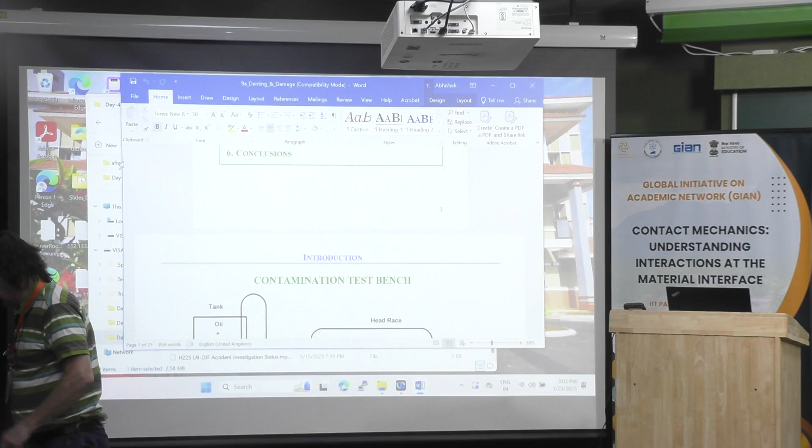That's okay. Is everybody here? Maybe not, we have to wait a little more. No, I need to download a video which is on my computer and not on this one.

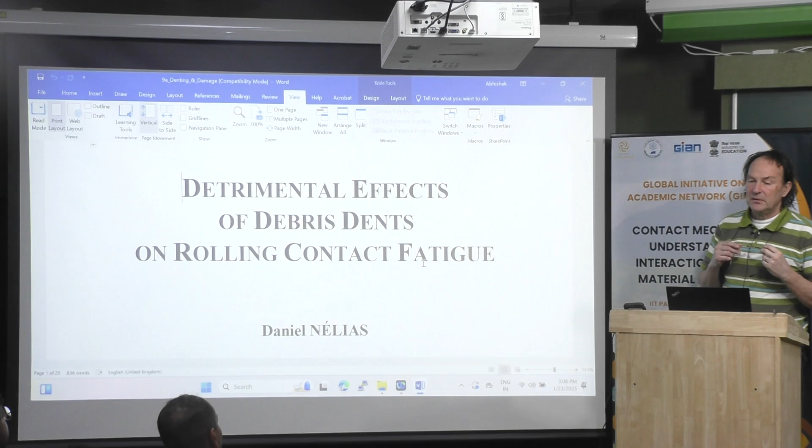We'd like to speak about debris denting and the effect on fatigue life. Before going to the practical application, I just would like to make an overview of debris denting, how it happens, why, and give you some idea of the mechanism involved.

This is what I will present. I will go back a little to EHL lubrication and to some tests that we have done, and after that I will go to the practical application. This is the content of the talk. This is not a PowerPoint.

To do the test, what we have done is develop first a test bench.

The idea is the following: there's a lot of contaminants in oil, even in a new tank or new barrel. You can buy a can, and if you look what is inside, I will show you later a lot of particles.

Then to do experiments, what we have developed in the lab, and for some other companies using the same type of test bench, is first we use a conical tank. The reason for a conical tank is to avoid concentration of particles.

What we do is put some particles in the oil. For example, you have 10 liters of oil, you put 1 gram or 2 grams of contaminants.

You know the size, and you should take particles and sieve them into classes of size, for example 5 to 10 micrometers, 10 to 20, 20 to 32 micrometers. When the size is very big, above 32 micrometers, it's not too difficult to sieve the particles.

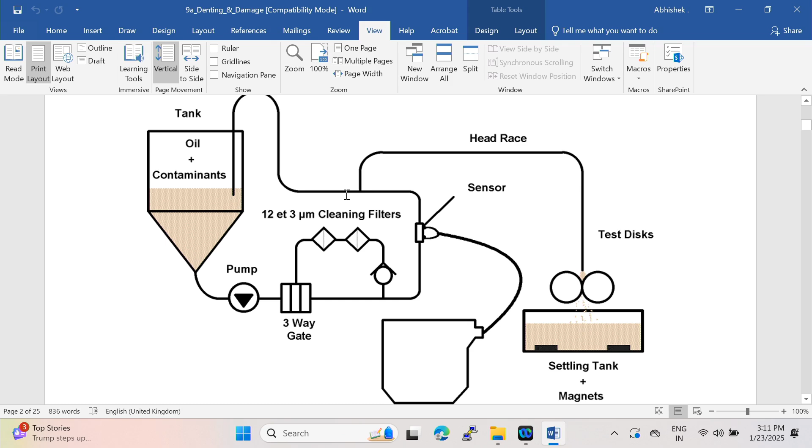After that, we have a small peristaltic pump. We just take a small percentage of the flow, and you can lubricate a machine like that.

Knowing the number of particles per liter, the flow, and within the two rollers the film thickness and the speed, you can calculate the oil flow. For example, if you have 1 particle per liter and the oil flow is 1 liter per minute, you should have 1 particle per minute coming to the contact.

This is the principle. To be sure that you have the correct number of particles, you have a particle counter here, and it counts. There is a small derivation, and it counts particles one by one. This is an optical sensor.

This type of device is now used on some aircraft engines, jet engines, to monitor online during flight the number of particles. This is the principle that we developed.

After the experiments, you may clean the oil. You have a very fine filter here, and with a three-way gate, you can clean all the oil to remove all the particles.

And when you do that, to lubricate the contact, it can be also a bearing. You can do that for a full bearing, but within an equipment you shouldn't have corners and so on, because you won't be able to clean the system. Here it is very easy to clean it, but not for a full bearing. It depends on your device.

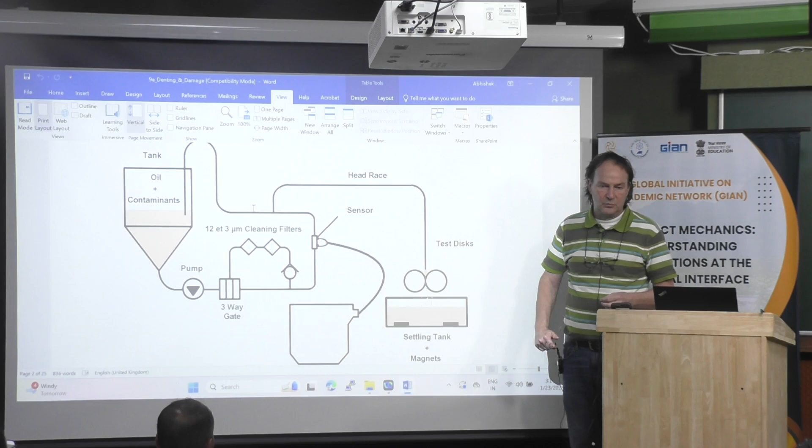This is an example of the number of dents you can produce with that. The first demonstration was to show that you can predict the number of dents. You know the number of particles within the oil, and you know the oil flow, which is the speed multiplied by the thickness of the EHL film, multiplied by the width. So you can calculate.

In black here, this is an example of measurement. This is the number of dents that we counted, about 1,000, a little more than that - this is a log scale. Now, for example, if the class of particle is between 20 to 32 micrometers, and you know how many milligrams you put in the oil, we can know that for the largest size of particles, you should have something like 900 particles. If you have smaller particles, you will have more particles. Then the estimation will be a little more than 1,000.

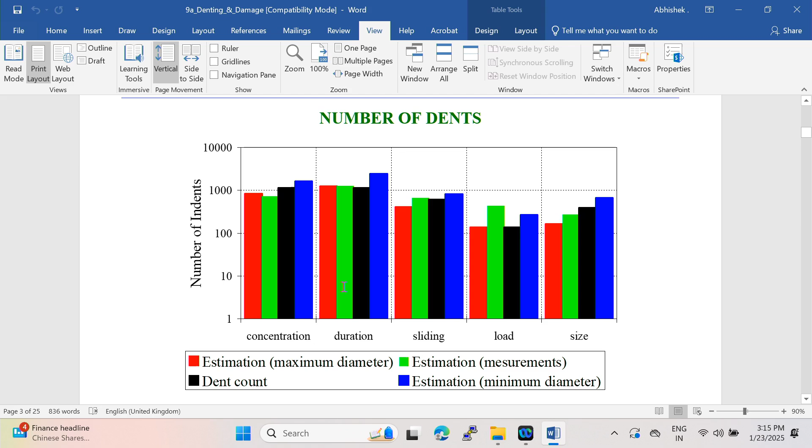You can compare the estimation to the measurement. For the second test, we change the duration of the test - for example, we double the time. The third test, we add some sliding: first it was pure rolling, after it was sliding. Here we increase the load by a factor of 2, 3, or 4. That decreases the EHL film thickness, which reduces oil flow within the contact. Also, because the film thickness is thinner, maybe some particles are rejected. The last one is done for bigger particles and so on.

With that, we were able to demonstrate that when you have 1,000 particles coming into the contact, they will all come into the contact, typically for particles between 10 and 32 micrometers, with the film thickness below 1 micrometer. This proves - and this is only experimental work - that particles are not ejected from the contact. They go through the contact, and this way they can dent the surface.

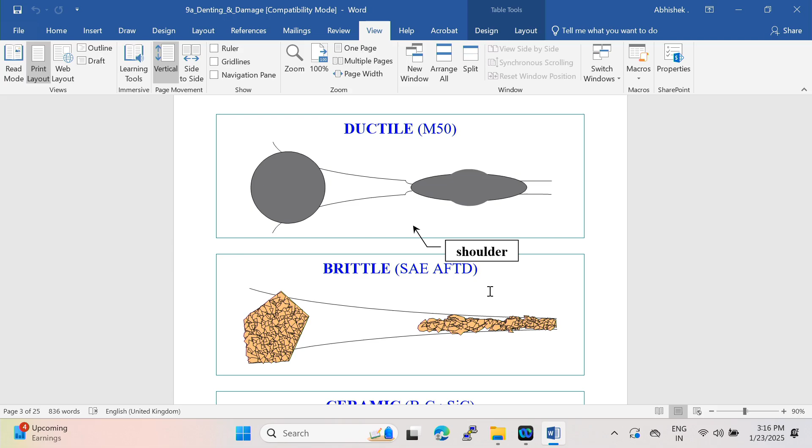Typically, this is a different type of denting you can observe. The first one is for metallic particle, M50, which is a bearing steel. There is a specific shape. At the beginning, you crush the particle just at the top, and after a while you start to indent both surfaces. Because it happens very quickly, you start to heat the materials and they start to flow. After a while, the yield strength of the material is lower, and it creates this type of shape. We were able to see that on particles and also measure it on the surface.

This is a schematic view, but coming from experiments, of when you have brittle materials. AFTD is in fact a sand - a silicium sand coming from some desert in the US. It's very expensive, a kilogram should be a few hundred dollars, because it is calibrated and there is a norm: you have such a number of particles smaller than 2 micrometers, a Gaussian distribution, and above 100 micrometers there is almost no particles - some type of distribution of particles.

This typical sand is used to make a test on many devices. For example, for helicopter engines, they use that for ingestion of sand into the engine - this is a standard method. But this is not the main purpose here. It's just to show that when you have a brittle material, it will break into many small parts, and you can observe on the surface not only one dent but many dents, each time a particle of sand enters into the contact.

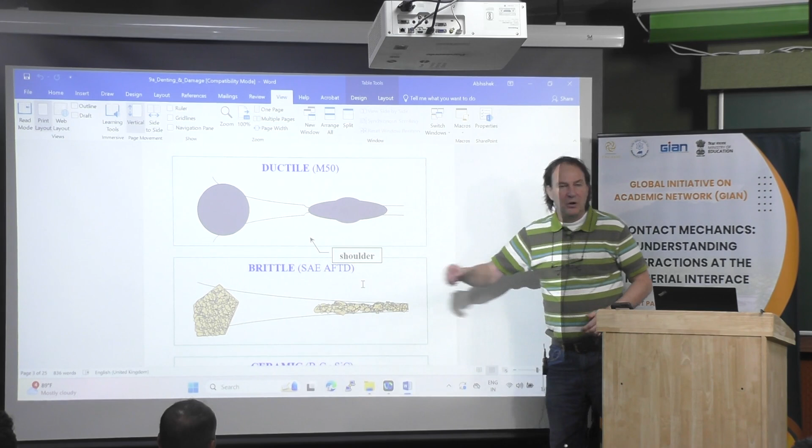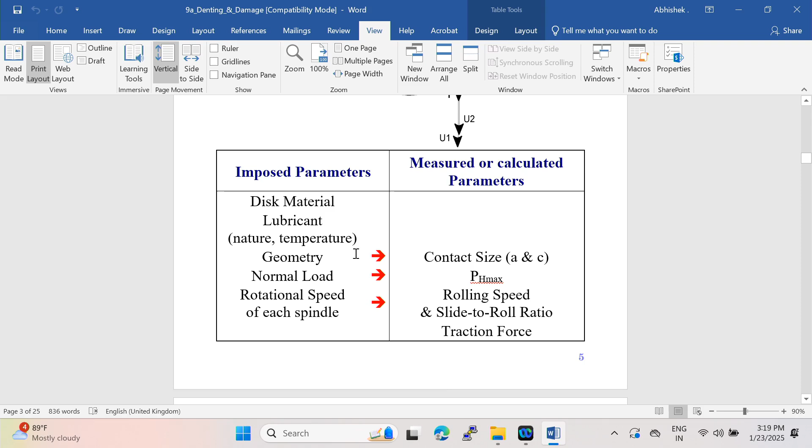This is what I said before, experimental results with a twin disc machine, a high speed twin disc machine. But anyway, I will go quickly.

This is typically what you can get from the simulation if you have an EHL solver. In green you have the deformed geometry within the contact. You can see here the dent, a dent with two shoulders. And in red you have the pressure within the contact when the dent comes into the contact.

Here there is a small slide-to-roll ratio, 1.5%. This is the ratio between the sliding speed and the rolling speed. And after that you can calculate the stress distribution within the material.

Typically this is what we use as material: a 52-100 steel disc of radius 40 millimeters with high quality roughness, 0.1 micrometers. The lubricant is an aerospace lubricant, 5 cSt at 100 degrees C, used for most engine bearings and turbine engines. Temperature is 80 degrees. Particles are made of M50, with a size from 32 to 40 micrometers.

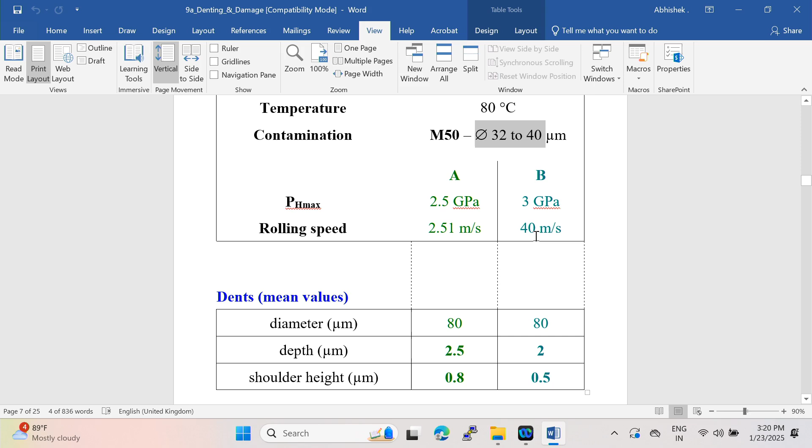It's easier to manipulate. Typically we did two types of tests: 2.5 gigapascals at low speed and 3 gigapascals at high speed, 40 meters per second. These are the dents we observe, with a mean diameter of 80 micrometers, much higher than the initial particle diameter because it is deformed.

The depth is 2.5 or 2 micrometers, which is very shallow. In fact it's a very shallow dent, not the 35 micrometers I showed Monday or Tuesday. The shoulder height is typically 0.8 or 0.5 micrometers, depending on the speed.

Then we did several tests with the dent on the slower surface or the faster surface. I would just like to show you the effect of slide-to-roll ratio. I think this is quite interesting, there's interesting physics behind that.

This is typically the geometry of the dent, you can see how it looks. This is not made by an indenter, it's made naturally by natural contamination. It's not purely axisymmetric, there is some slight difference. Also there is some damage ahead of the dent or behind the dent, depending. I think the circle does not correspond to the exact position.

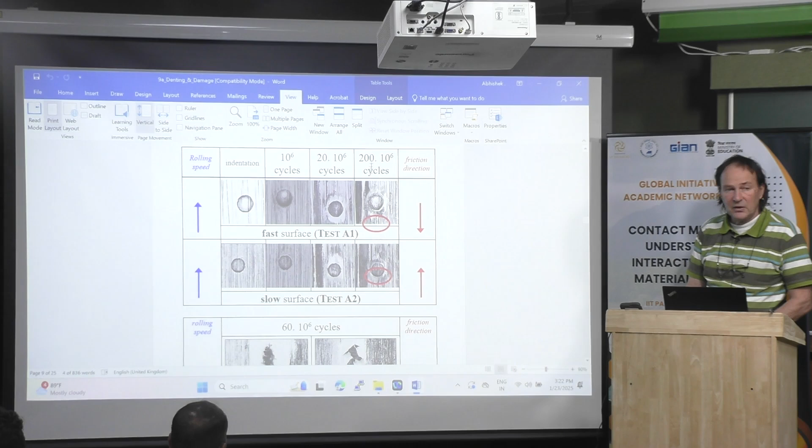You can see for the same dent, after 1 million cycles, 20 million, or 200 million cycles, how it evolves. I don't know here if it is pure rolling or not. This is pure rolling on the top, and this is with tests A2, A1, A2 as shown before, A1, A2, B1.

The difference is the slide-to-roll ratio and the normal load. Whether the disc is on the fast or slow surface, there is always some slide-to-roll ratio, and you can see how the damage can propagate nearby the dent, then propagate ahead of the dent according to the friction direction.

I would like to mostly emphasize something which is due to the sliding. This is the location of the spall, it can be ahead of or behind the dent. Okay, maybe not this one, we can skip this one.

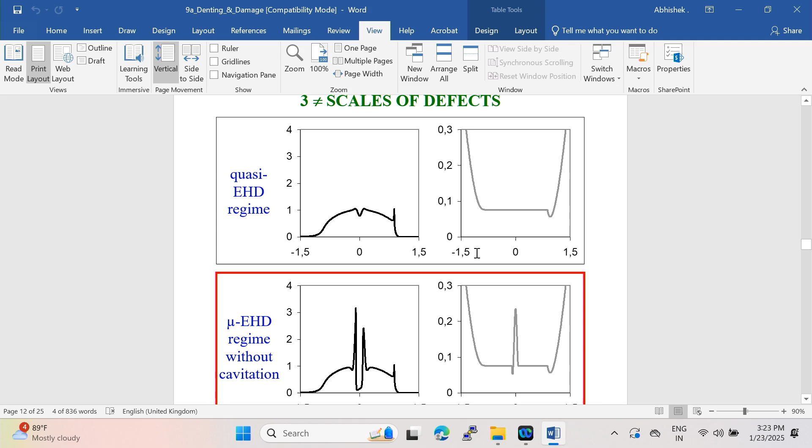Now two important figures to explain how it works. This is a solution when you have a shallow dent, which is not very deep. This is a pressure distribution.

The dent, for example, if it has a depth of 1 micrometer, due to the elastic deformation on the deformed surface, you can notice the dent. It is completely squeezed by the deformation. Here we are in pure rolling.

Sometimes in the literature, I have seen a paper many years ago from a Japanese group. They said that if you put many dents on the surface, using a laser for example, it could be beneficial for the fatigue life. Why? Because when you squeeze the dent, it will release some oil, which will lubricate. Even if you miss some oil, it will be beneficial. This is correct only if you have a very shallow dent and no shoulder, but this corresponds to this situation.

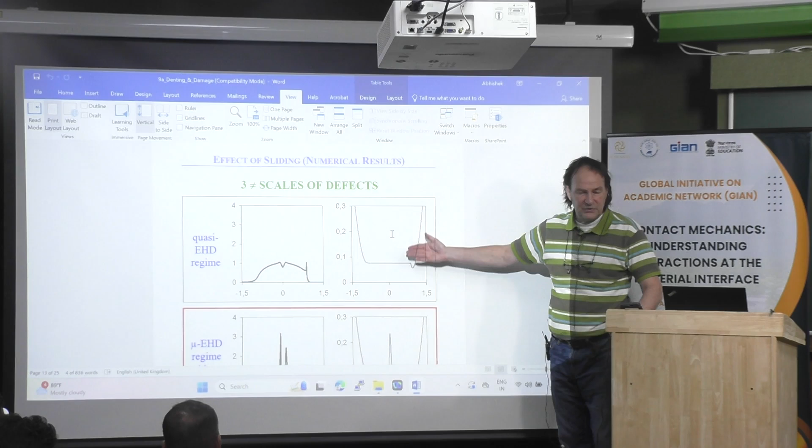Now, these are two other situations. Now the dent is deeper. When it is deformed, you can still see the cavity.

And there is also some peak of pressure which is due to the EHL lubrication. On the left, you can see that the minimum pressure is not nil, which means that there is no cavitation. Okay, then you can have that.

It's quite typical for depths of a few micrometers. You can have typically this situation: you can see the dent, and you have no cavitation in the vicinity of the dent.

Now, if you have a very deep dent, you will have this type of solution. You can see the dent, and you have cavitation in the center of the contact here because there is no pressure. Then there are two points.

The first one is that when you cavitate, it means that you may have metallic contact around the dent because you have no lubrication. You have cavitated, then you may have metal-to-metal contact. Then it can be very detrimental for the life of the bearing.

And the second point is that numerically, this is very difficult to have a correct solution because you have to solve the cavitation problem within an EHL. And I think that today there is almost nobody that can do that. It's still a subject of research to have an algorithm that gives the EHL solution in 3D when you have cavitation, because you should maintain the equilibrium of the flow.

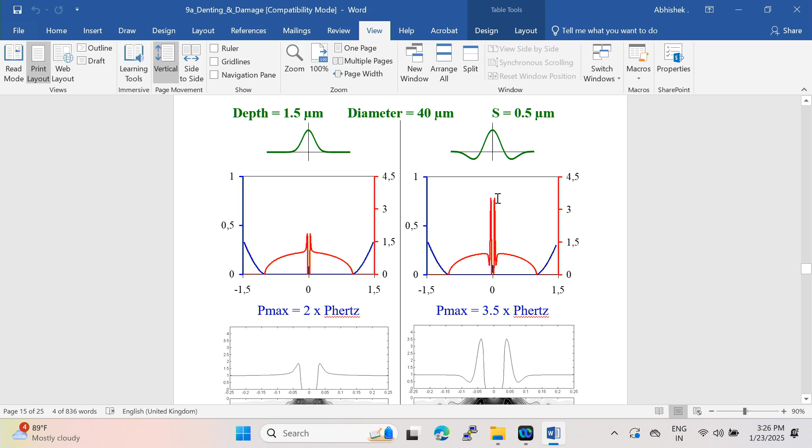Some numerical experimental data. These are the effect of the shoulder. You can see on the left a dent without shoulder, then the peaks of pressure are very small, and a dent with a shoulder which is not very high, 0.5 micrometers. You can see a very huge magnitude for the peak of pressure.

Typically here, the peak of pressure is about 2 times the Hertzian pressure, and here the magnitude is about 3.5 times the Hertzian pressure due to the shoulder. Then the shoulder is a problem for dents.

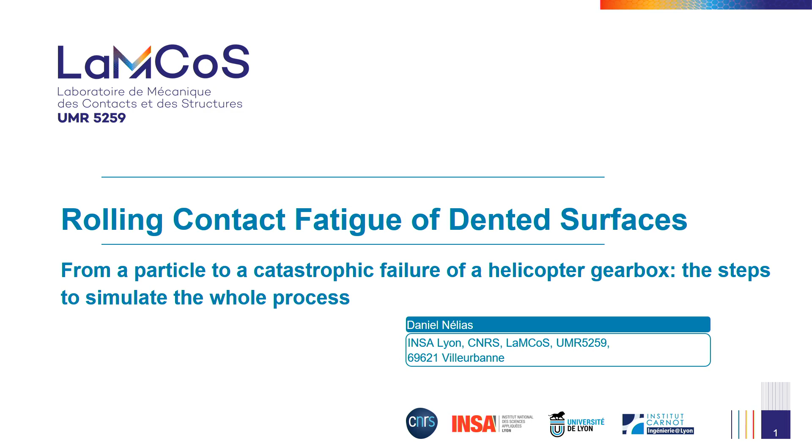Okay, then I will investigate this accident. In fact, this is a failure of a helicopter gearbox, the main gearbox of a helicopter.

And this is not this helicopter, but something else. In fact, it was a Puma. The name is Puma, Super Puma.

At the entrance, depending on the number of engines, usually you have one, two, or three entrances from each engine. And the horizontal movement, you have spiroconic gears, like here, and you convert the horizontal rotation towards vertical rotation.

Typically at the entrance, the speed of the engine - there is already for each turbine engine a small reductor, and then the entrance into the main gearbox is between 20,000 RPM to 6,000 RPM, depending on the size of the engine and the helicopter. And the rotor rotation is between 200 to 400 rotations per minute.

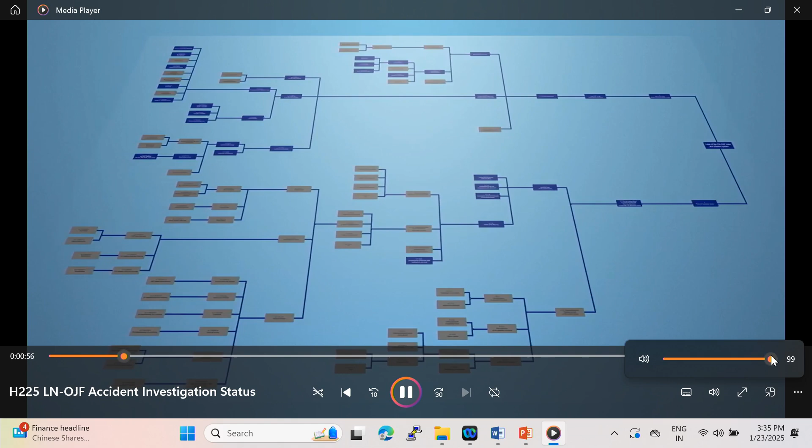Initial observations revealed that the rotor had separated from the cabin. In response, we began by listing all the possible scenarios that could have led to such an outcome, even the most improbable ones. One by one, every branch on the fault tree analysis was put to the test in order to confirm or rule out each hypothesis.

We drew on all the information gathered by the investigators on site to piece together exactly what happened. Each and every detail was taken into consideration. We also used complex numerical models simulating different failure modes, comparing them with observations of the actual parts.

In the meantime, we considered and examined a 2009 Super Puma accident that bore similarities. Finally, we carried out about 2,000 hours of testing in dozens of different tests, the aim being to reproduce the failure scenarios envisioned and to identify which one actually occurred.

In total, more than 370 people were called upon during the course of a year. Throughout the official investigation led by the Norwegian Accident Investigation Board and supported by Airbus Helicopters, we were able to identify precisely the sequence of events.

The origin was traced back to the inside of the main gearbox, a key mechanism in the aircraft, as it transmits power from the engines to the rotors, while reducing rotational speed from 23,000 RPM to 265 RPM for the main rotor. The inside is a series of reduction stages comprising gears manufactured using the finest material and surface treatment technologies and in line with the highest quality standards.

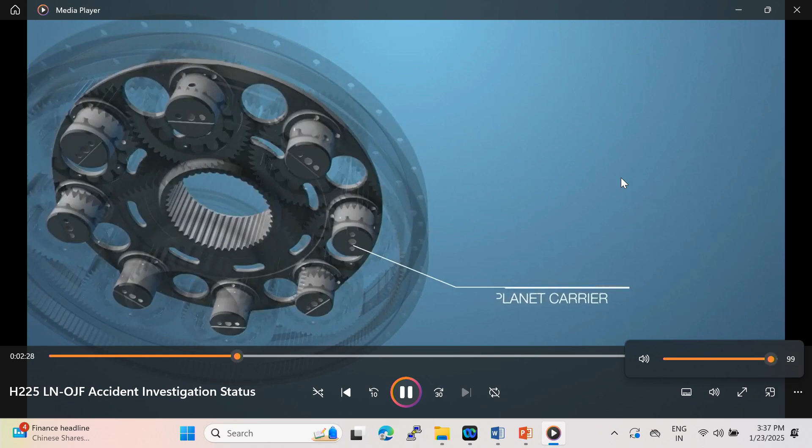The second stage, epicyclic gear train, comprises a sun gear, 8 planet gears, a planet carrier, and a fixed ring. Each planet gear contains 2 inner races, 2 rows of rollers, 1 outer ring. It is inside this ring that the failure began, with an initial and very limited spalling.

Unexpectedly, this very limited spalling gave way to a crack, which then spread until the planet gear split in two between 2 teeth. The space between these 2 teeth grew, causing a collision with a tooth on the sun gear, and the planet gear broke instantly.

Pulled by its own inertia, the main rotor caused the top section of the main gearbox to shear off and separate from the structure.

Let's go back to the beginning, however. How could such an accident have happened?

The potential contributing factors were identified, and safety barriers were put in place to eliminate their reoccurrence. One of them is the non-detection of very limited spalling.

Spalling is a normal degradation of bearings that remains acceptable up to a certain amount. This is monitored with magnetic plugs that collect metallic particles. In the case of LNOJF, the defined practice of particle detection was not sufficient to reveal very limited spalling.

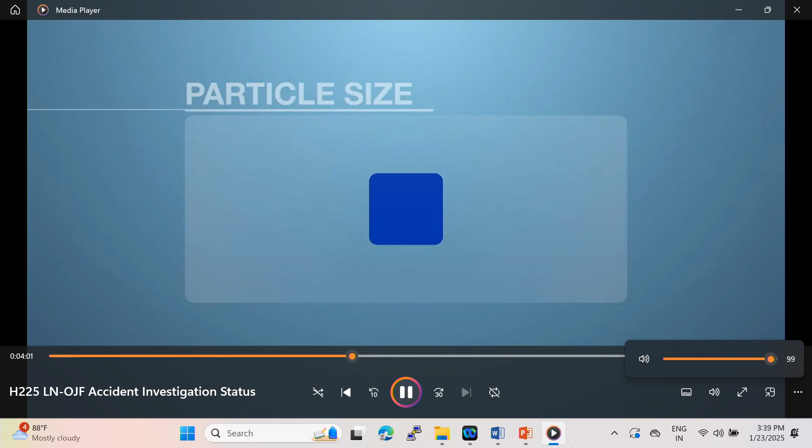We have therefore improved this practice of metal particle detection. The frequency of inspections has been significantly increased. Stricter removal criteria have been put in place regarding particle sizes. Detection methods were completely overhauled and now include a latest generation magnetic plug with increased performance.

Another potential contributing factor is the phenomenon of fatigue. Some metal parts subjected to high repeated stress have a defined number of cycles before their possible failure. Airbus Helicopters therefore defines a maximum operating time for each part.

In 2004, Airbus Helicopters defined a maximum operating time in accordance with the certification requirements. In 2017, based on the learnings from the accident investigation, this maximum operating time has been reduced by a factor of 4. Another potential contributing factor is linked to the design of the planet gear.

Two suppliers manufacture these planet gears, and their designs are not 100% identical, even if both match the technical specifications. The second creates greater contact pressure and was used in the LNOJF's main gearbox. This planet gear has now been prohibited outright.

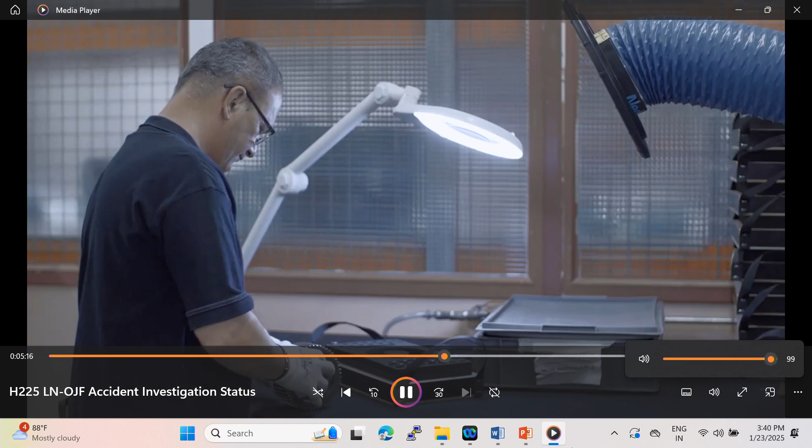Before being fitted onto the helicopter, the main gearbox in question sustained a fall during a road transportation accident. It has been decided to withdraw from service any main gearbox having suffered a shock, a lightning strike, a hard landing. In addition, we put in place a series of initiatives to improve the shock resistance of the main gearbox during transportation and to better report back any unexpected event.

Sensors that capture parameters such as temperature, pressure, altitude, lighting, inclination, and shock level have been placed on the main gearbox, and the previous history of the part can be closely monitored. The packaging for the main gearbox now includes highly visible stickers that change color if the crate sustains a certain level of force or shock.

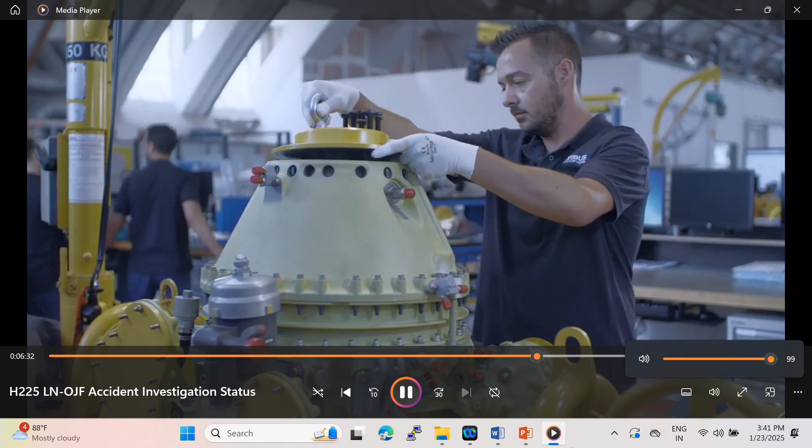The last potential contributing factor is contamination by impurities finding their way into the main gearbox during maintenance, which could then have created damage in the planet gear leading to spalling. Additional measures have been put in place to protect the main gearbox during maintenance operations, and disassembly of main gearbox modules can now only be performed by an Airbus Helicopters certified maintenance or repair centre.

The safety barriers put in place are aimed at eliminating the contributing factors to the LNOJF accident. Based on these measures, the European Aviation Safety Agency and all aviation authorities worldwide have approved the return to service of the H225 and the AS332L2.

Any accident is one too many, and in order to reach our zero accident goal, we are committed to continually improving. The investigation underway led us to thoroughly review and rethink many of our quality and safety processes, not only for the Super Puma, but for all helicopters in the Airbus range.

One example is how we are working on improvements for handling and tracking dynamic components. This includes developing better solutions for documentation, repair feedback, and digital solutions for better traceability. Furthermore, taking what we have learned from these investigations, we have gone back and checked the stress analysis for all our aircraft.

Okay, in fact, you can find this video online. It's somewhere on the internet. It's a public one. Then you can see the...

Problem. Okay, it was a debris denting, in fact, at the origin, and the crack propagated just below the surface without forming any spall, because usually you form a spall, you know, some spalls, some metallic debris, and you have a device that can get magnetic particles.

And when you have too many metallic particles, you have a signal in the helicopter. In the past, sometimes the pilot used to stop the good engine and let the wrong engine keep operating. Then there were several crashes in the past due to the error of the pilot.

But okay, here it was no advertisement because there was no spalling, no metallic particles in the oil. It was not possible to detect that. In fact, there are two techniques.

In the old helicopters, also in the old time, because sometimes it was cheaper to buy a helicopter without an electronic device, the mechanic was checking the magnetic plug each time the helicopter landed.

But now it's mostly in the cockpit. Then the pilot can see if there is something wrong. The same also for aircraft engines.

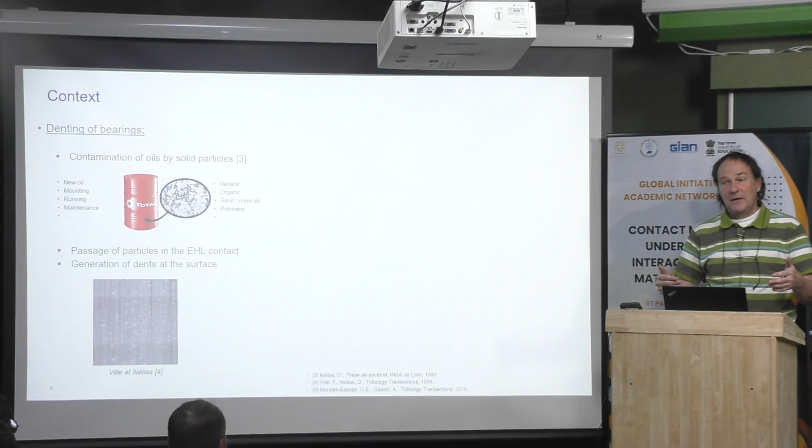And when you do some maintenance, also you have to be careful not to ingest particles. For example, when you are outside, if there is some wind, if you have some sand outside, you have to be careful not to open the oil reservoir to renew the oil, because you will ingest a lot of particles.

Typically, this is what will happen after a dent. You can see here the early beginning. First, you can see a crack, and then the crack will start to propagate, like that.

Then it depends on the bearing. For example, I used to change bearings on my car from time to time. It makes some noise on the wheel, especially when you turn in one direction. It depends where the damaged bearing is. But you can drive — I have old cars. I can drive 1,000 kilometers, 5,000 kilometers. There is no risk.

Now, if you have that on a jet engine, the US Air Force did some experiments like that. It's typically on the order of 1 or 2 minutes. After 1 or 2 minutes, you have to eject, if you have a mono engine. Now if you have 2 engines, it's better.

But it goes very, very fast because the rotational speed is very high, typically 40,000 to 50,000 RPM. Then it goes very, very fast. In a jet you have to eject. The same for a helicopter, although it depends where you are.

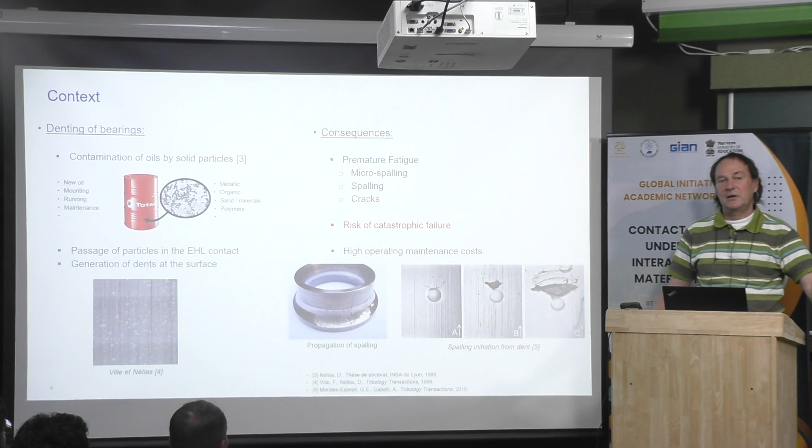For example, if you work in the mountains, for example to transport wood, it's very dangerous to land. Now if you are on a flat country, you are higher than 100 or 200 meters from the ground, by auto-rotation you can land. But only if there is a flat area, not in the city, and not in the forest or in the mountain.

Then what I will present to you is divided into 4 steps. It corresponds to 2 PhD theses that we developed to give them tools to reproduce that and to optimize the device.

On the left, I will show you some debris denting. This is a simulation done by a finite element method. There is, I think, no other way to do that simply. It's not very simple, but okay, we can do that with the finite element method.

Second, we will look at some fatigue criteria on the dent. We will evaluate different types of approaches — Dang Van, Fatemi-Socie, and so on — to see which one tends to give interesting results, a response to your problem.

We will deal also with EHL contact. I will show you what I started to present before, the effect of lubrication. And after that, we will start to work on crack propagation.

For that, we coupled our approach with what a colleague is developing, working on crack propagation using XFEM, the extended finite element method. We were using free software that's available, so that was convenient.

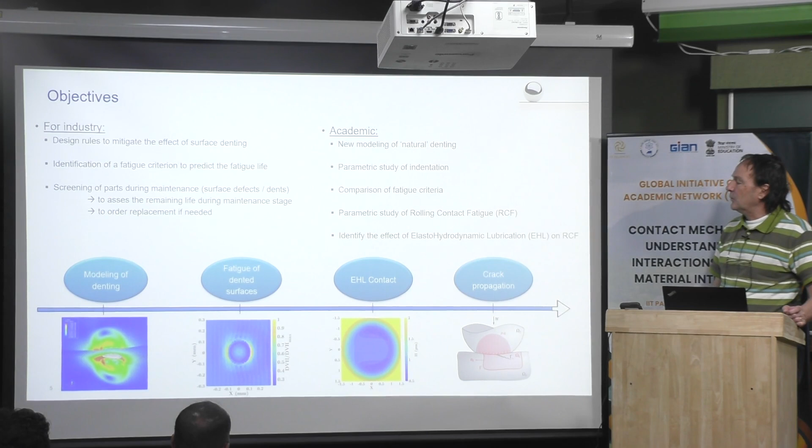With that, it was possible to compare different criteria for rolling contact fatigue, and also to see the effect of EHL. We also investigated the effect of residual stresses, because the surface is treated with a thermochemical treatment and is hardened.

On the left you can see particles. The initial shape was 32 micrometers in diameter, a cylindrical particle. At the end it's about 10 micrometers, and you can see a bump on top. I call that a flying saucer shape; a British colleague calls it a camembert, like the French cheese. Anyway, you can see how it deforms.

On modeling of denting: in the past it was always done with a finite element model, except for one researcher. The first work is due to Ioannides from SKF, using the finite element method, but it was only indentation, with no dynamic effect.

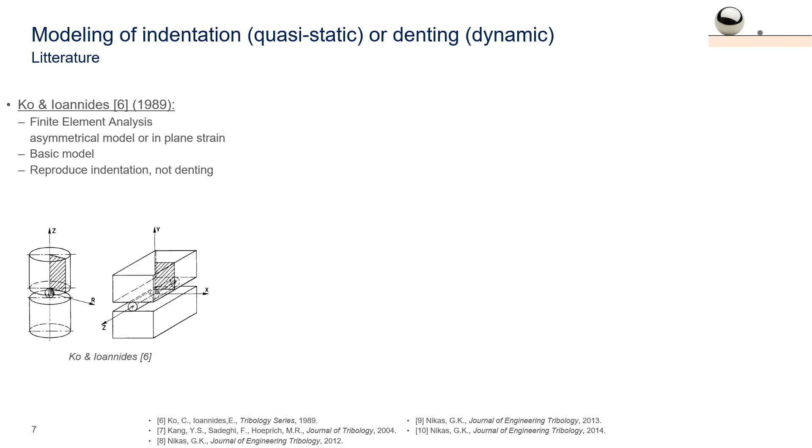A few years later, in 2004, Kang and Sadeghi from Purdue University, working with Mike Hoeprich from Timken, made a model where they were able to compress a dent between two rollers. This is a 3D and dynamic approach, considering dynamic effects. It was the first attempt and worked quite nicely, though the particle is not too deformed, and it was only pure rolling. Still, it was the first step to solving the problem.

Another researcher, Nikas from Imperial College, did everything analytically. He developed a model, transferred all the force to the particle, and predicted the deformed shape, the heating of the particle, and so on. But it was quite heavy to manipulate, and aside from him I never saw another paper on the topic, though he published several papers on it.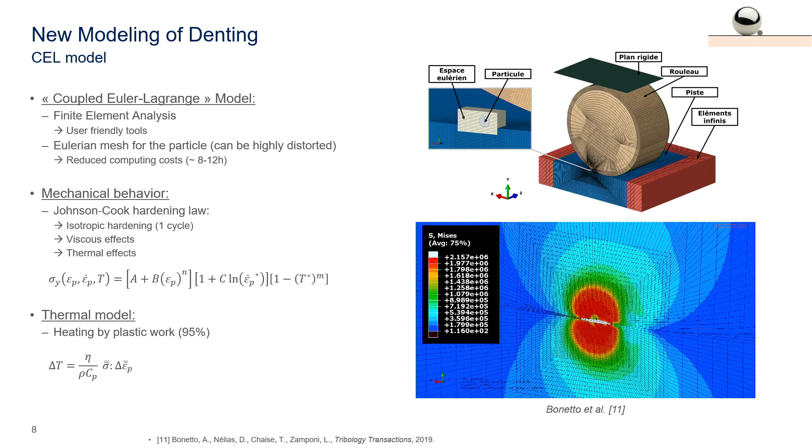This is what we did. You can see a simulation below: here is the Eulerian domain, where the particle deforms like a fluid, while the two surrounding bodies are in fact modeled with a Lagrangian mesh. It's possible to do that with Abaqus.

Several years ago, maybe 10 years ago, we did some work on cold spray and simulated it with this technique. The main difficulty was that it wasn't possible to estimate the heating of the particle, it was only isothermal. Now it's possible to transfer part of the deformation into heat and predict the temperature of the particle.

So now you have the tool. When you develop the model, you can change the geometry, change the material, use not a spherical particle but a square or small cube, and so on.

Now you need properties. This is one of the difficulties. Here we decided to use a Johnson-Cook model. The Johnson-Cook model gives you the yield strength depending on the plastic strain rate and the temperature. In fact, this model is mostly empirical. You have to take that from the literature.

And also we consider that the plastic work here is transferred at 95% into heat. Then there is an inelastic deformation, in fact, transferred to heat, and will heat the particle. Then you should know also the properties of the material versus temperature.

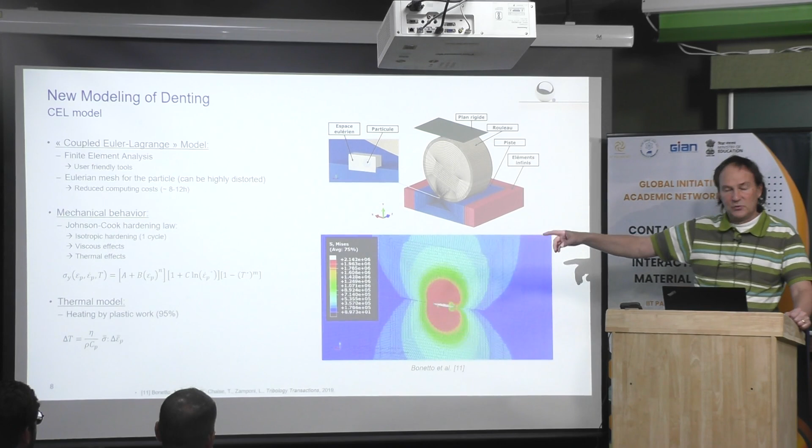Then this is a typical reference situation. We use the same steel, classical bearing steel, low temperature bearing steel, 52-100. We have two surfaces that are moving at 20 meters per second. We have two friction coefficients, one between the particle and the surface, and one between the two bodies. And in fact, between the two bodies, I think we use something frictionless, or maybe 1%, something negligible. But you need to have some friction coefficient between the particle and the bodies, because otherwise it will not enter into the contact. It should be trapped to go into the contact.

The size is quite large, but this is a reference case, and we were able to do simulations with smaller or bigger particles. We also took some data similar to other colleagues, and from experiment we compared to some data from the literature. In fact, Fabrice Ville did his PhD with me nearly 30 years ago, something like that. Then we have a lot of experimental data. And the maximum pressure is 1.5 gigapascal, which is typical for aerospace applications, including for this application.

Then this is a comparison between the result of the model. The blue curve corresponds to the simulation, and the red and the yellow one correspond to experiments. First, you can see there is a good agreement, roughly, because it's difficult to have exactly the same parameters.

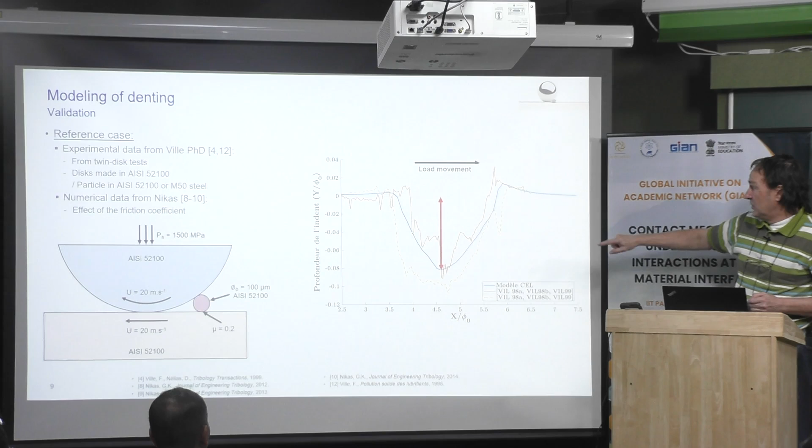You can see here the depth, I don't know if it is indicated, but okay, this is dimensionless. I don't know if there is somewhere the size indicated, but anyway. Then the main parameters are the dent depth, which is from the surface far from the dent. This is the depth. After you have the diameter, and you have the shoulder height. Then you have three interesting parameters: this one and the shoulder height on the right, for example.

You can make a simple mechanical model to see, depending on the friction coefficient, what you need to have the particle entering into the contact. If there is no friction coefficient, it will be ejected. Then depending on the size of the particle and on the friction coefficient, you can calculate the size of the particles that will enter into the contact.

Now, this is what I said before, some kind of flying saucer shape. At the beginning, on the left, you produce a small dent on both sides of the contacting surfaces. After a while, because you hit the particle, it starts to flow very quickly, and then you have this type of shape, and it corresponds to the particle shown before. Maybe not the same particle because there are many particles, but typically we had many dents like that and many particles as I presented before. And then when you remove the particle, you have a dent, in fact.

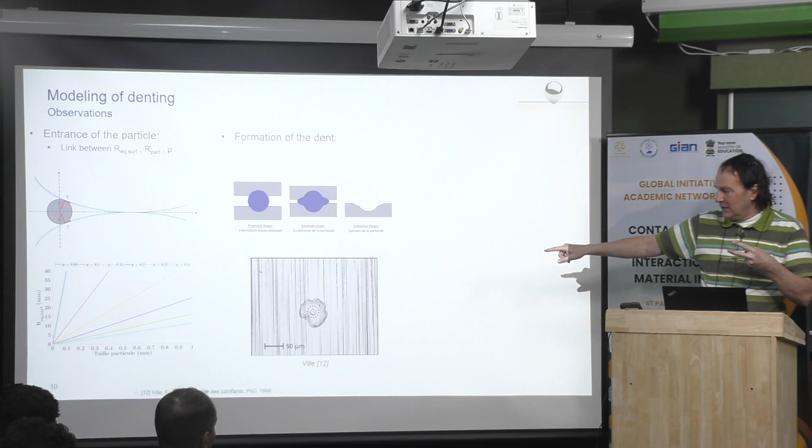Very often what we do is dent one of the discs like that, or it can be done with an artificial indent. We make a few cycles of operation, for example 1 minute, 10 minutes. Then we stop, dismount the dented disc, and use only 2 smooth discs. But one of the smooth discs will have been submitted to very high pressure, and it will fail very quickly.

It's difficult to see, but sometimes you can see a mark on the other disc. This is what we call the boomerang effect: there is no dent, but the dent will mark the other disc when the dent is very important.

Another interesting point is the effect of the size of the particle and the effect of the material. For example, imagine you have two steels in contact, and the particle is made of polymer, so it's very soft. When you have a large particle, when you deform it, it will flow like that and be ejected from the contact without marking the surface.

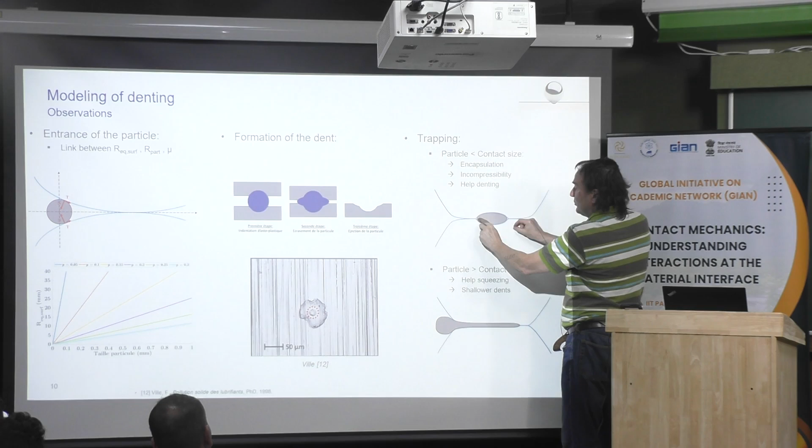Now, if you trap the particle within the two surfaces, even if it is very soft, because it is incompressible this will mark both surfaces. This is not because you have something very soft in the oil, some polymer for example - it can be very critical if it is of small size, because when you deform it, as soon as it touches the surface around the particle it cannot move anywhere, and because it is incompressible it will mark the surface. With air, for example, it's the same. If you have particles like that in the oil, you can damage the surface.

Now I will show you some parametric study. We will change the load from 0.5 to 2.5 gigapascal. We can change the material - the 52100, the classical ceramic, which is used for hybrid bearings, is very well known.

The last one is an interesting material - I don't know if you know this material, 60 NiTi. It's like a shape memory alloy, but this is not that. In fact, yes, but this is mostly when you invert the composition of nickel and titanium - 40 should be a memory alloy type. But this one is what we call a hyperelastic material.

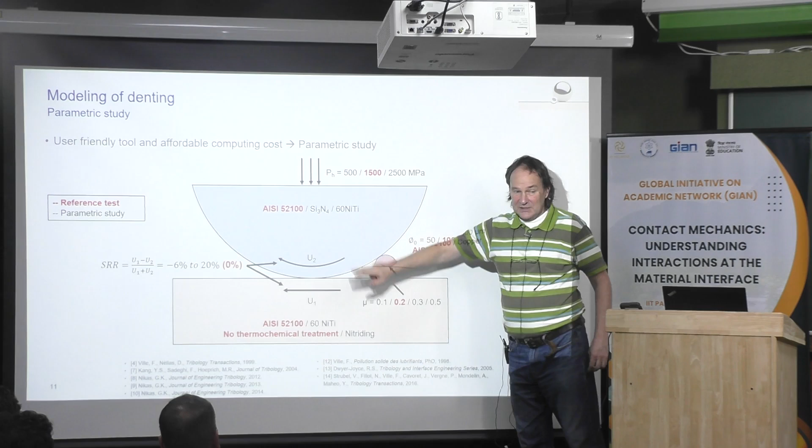It has been developed by NASA very recently by Christopher DellaCorte. I don't know if you know him - he's now the editor of the journal Tribology Transactions. He's not at NASA anymore, he's retired, now professor at a US university, I don't remember the name. It's hyperelastic, so there is almost no plasticity, and it's very light. The modulus is also lower than that of steel, but the yield strength is very, very high. And it has no oxidation.

They use this material for the bearing in the pump of the International Space Station, for recycling water.

Sir, here in the formula for SRR, it should be U1 minus U2 over U1 plus U2 divided by 2. Yes, because it is a mean velocity. Yes, in fact, you are correct.

You have to be careful when you speak about the slide to roll ratio. Usually when I use that in a document, I put always the expression, because sometimes the rolling speed is a mean speed, and sometimes it's the sum. For me, the slide to roll ratio, there is not the 2. It's U1 plus U2. Then it's delta U divided by U, and U is a sum for me. Okay, but you are correct, very often there is a confusion. We call the same thing, which is not the same thing.

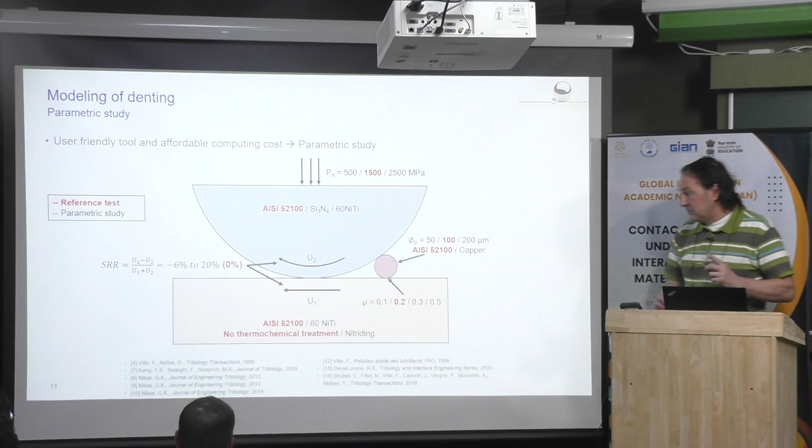When it is in red, it corresponds to the reference situation. Then I will quickly go to that and show you some results. And also, yes, it was without residual stresses or with residual stresses. Then we did consider the effect of surface treatment, here, nitriding, for example.

Okay, then this is, for example, the effect of the particle diameter. What you can see, of course, here everything is dimensionless. Then if the particle is bigger, it means that the dent should be bigger. But in comparison to the diameter, because phi 0 here corresponds to the diameter of the particle, in fact there is almost no difference. Okay? Maybe here, but okay, there is almost no difference, or very little difference, as far as the particle is smaller than the contactor size. Because if it is bigger, you cannot create a dent, it will be different.

Now something which is interesting is what happens if you have two steel rollers, or if you have one steel roller and one ceramic. Then ceramic, in fact, is not only elastic, there is some plasticity, but to see some dent on ceramic, you should have a pressure higher than 10 gigapascal, 10 or 12 gigapascal. Okay? Then for our application, it behaves like elastic materials.

Then something interesting here is this is the dent here in red, the dent created by a particle when both materials in contact are metals, steels, and this is when you have one ceramic and one metallic roller. In fact, the dent is almost double, but this is because there is no plasticity in the ceramic roller. And just to say that when you have a ceramic material, it is very detrimental for the opposite one, that will see more plasticity. Okay, this is what you have to retain.

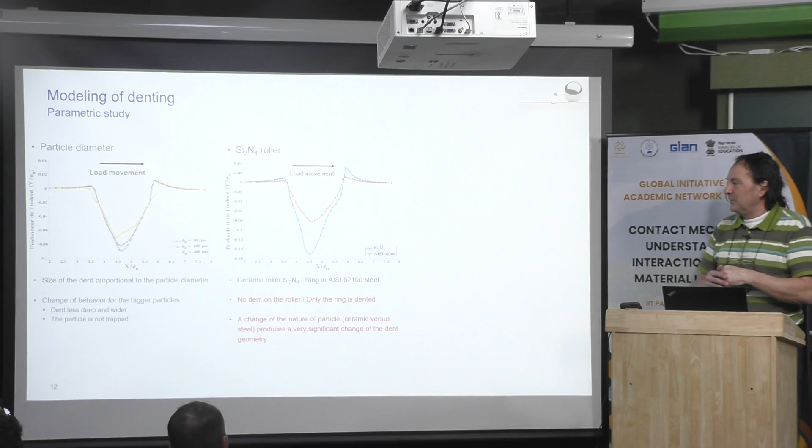Now I know that, for example, the company SKF, 10 years ago, they promoted hybrid bearings, or sometimes they also managed to have a full metallic bearing with one ceramic ball. And they were saying that the ceramic ball is very useful to remove surface defects. It will act like machining, in fact. Okay? But except for this one, okay, it is sure that the dent will be deeper. This is when you have to choose if you buy a ceramic ball, a hybrid ball, or a full steel ball. This is one of the points you should consider.

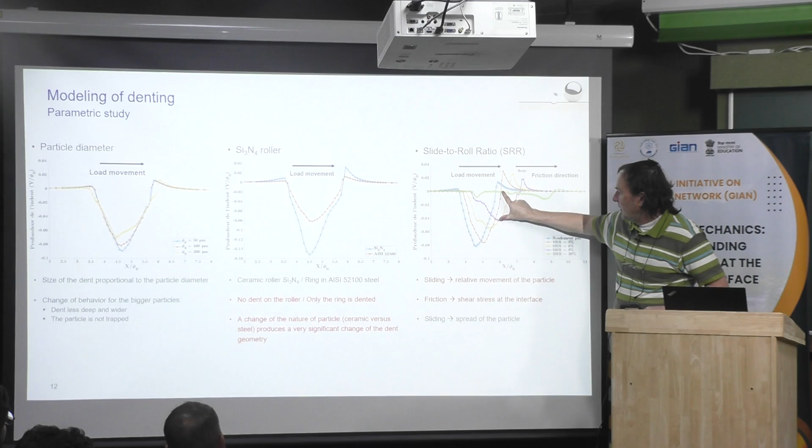And this is the effect of the slide to roll ratio. Then the blue curve here corresponds to something which should be in pure rolling. Okay, this is in pure rolling. And when you increase the slide to roll ratio, in fact, you will have a dent which is larger. You will spread, in fact, the surface defect, and also the shoulder will diminish. And okay, then you have a larger dent, and it will be shallower. And normally, also the shoulder should be smaller.

Then okay, you can do like that many simulations and try to get some trends, the main results. I did not show you, but if you change the load, there is no effect. In fact, then there is no effect on the dent. The dent is the same. You have the same residual stresses and so on. The friction coefficient plays a role because it will crush the particles. You will laminate the particle, in fact. Then it plays a quite significant role.

The slide to roll ratio also plays a significant role. In fact, the friction coefficient plays also another role, which is when the particle is deformed. When you have a high friction coefficient, it is blocked. It cannot deform a lot. It will be blocked. Okay. If there is no friction coefficient, it will easily flow between the two surfaces.

The particle diameter has a very little effect, only when it is very big compared to very small. Of course, the particle material has some effect because it will affect the shape of the dent, the depth of the dent. The bearing material also plays some role, and also residual stresses due to thermochemical treatment.

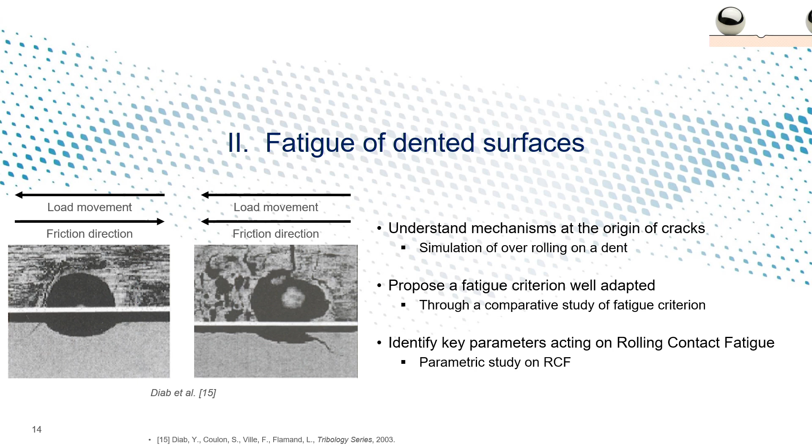I said before that the load movement is interesting when you have butterflies. If the load is moving this way, it means that when you have a crack, imagine the butterfly is here, you have the inclusion, the butterfly will be like that, and the crack will be like that. This is linked to the load movement direction when you have to make some expertise, for example.

Now for the friction, the effect of friction, and the friction is this way, like that. The crack here is always opposite to the friction direction, like an arrow, like that. This one and this one, because it's like that. This is also something you can use if you want to know in which direction the friction is.

Okay, then we use the same tool. Okay, then now.

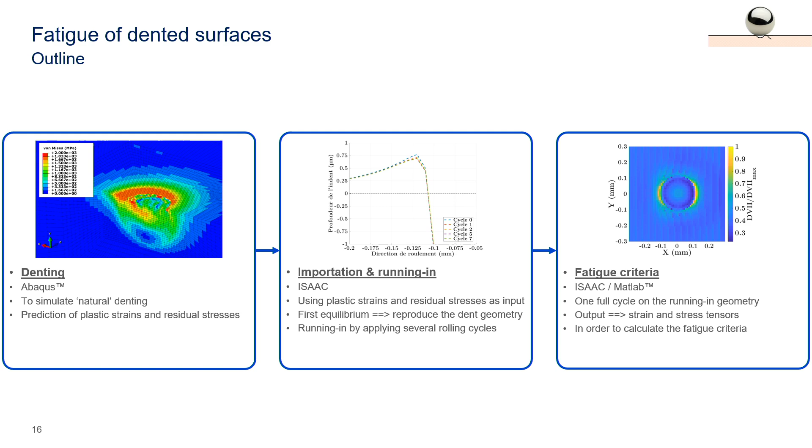What we do first is we use a solution from the finite element method, and we transfer the field from that to our model. Then within our model, we are able to make a simulation when a ball is rolling on the defect several times, because with the finite element method it's too costly, it will be too long.

We just have to transfer the data. When we transfer that, we transfer only the plastic strain or the inelastic strain. You don't have to transfer the residual stresses. Then you integrate that in the semi-analytical method, and you make the equilibrium of everything, and then you have the solution, the initial solution.

After that, you may have the ball rolling several times, and you also have to integrate the geometry of the dent. You have both to integrate the plastic state, the plastic strain, and also the geometry, as you can see here, with a shoulder which is lower than 1 micrometer. Then you can investigate what happened after several cycles.

As I said before, due to the friction, you can observe some cracks here, some damage on the opposite side. Now when you invert the direction of friction, you have the crack mostly in this direction, in the opposite side, and some damage everywhere here.

Then I will present you some results with different criterion. The first one with Sines and Crossland. After, I don't remember the order, but with the Smith, Watson, Topper criterion, Dang Van, and Brown-Miller, Fatemi-Socie.

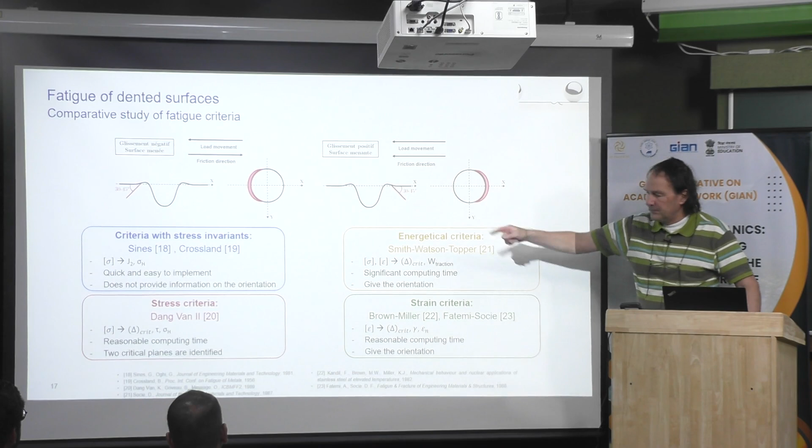In fact, in most criterion, for example, J2 here means von Mises stress, sigma H means the hydrostatic pressure, then the mean pressure. Okay, if you are globally in compression or in tension.

And for this model here, you have the critical plane where the crack can propagate. You have the shear stress, or the Tresca shear stress, equivalent to Tresca, and again the mean stress. Or instead of working with the stress, you can work with the strain, then you have the shear strain and the normal strain. It's equivalent, in fact, just you have to deal with other parameters.

And the Dang Van, I don't know if you know the Dang Van criterion. It's very well known and used in France with a lot of companies. I will present you some results.

So, for example, this is the result for the Crossland criterion, and this is the criterion. Each time you have a parameter to give some weight to, for example, to the mean stress or to the shear stress. And von Mises corresponds to shear stress, in fact. Von Mises and Tresca is about the same. If you have something with a pure hydrostatic pressure, von Mises equals 0, then von Mises corresponds to shear of the material.

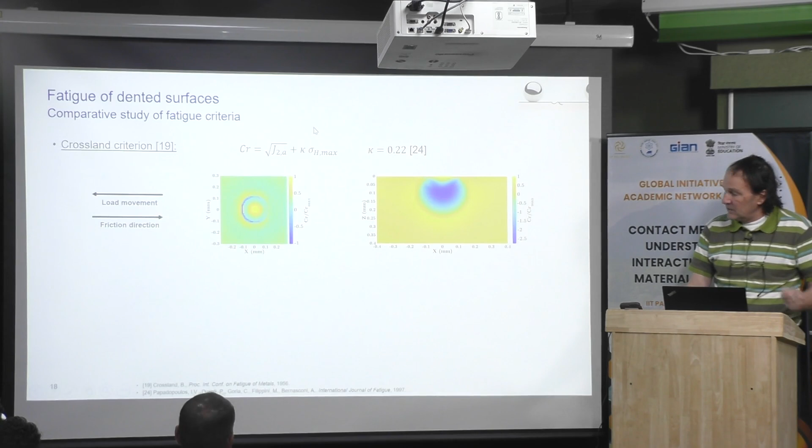As all other models. Now you have the constant, which is in fact one of the key parameters, because it can mask a lot of things. Then what you can see on the left is a top view, and this is a cross view. You cut the dent in two.

Now, if you check the effect of each parameter, the first one is only the shear stress, through the von Mises criterion, von Mises stress. You can see some peak of stress at the surface and nearby the dent. This is the effect of hydrostatic or mean stress, and this is the sum.

When you sum both, you can compare to your experimental results. For example, here this is blue, you are far below the criterion, so there should be no damage, yet there is some damage at the bottom. This is strange, this is not what we observe. Maybe this is due to this parameter, which comes from the literature.

First one, now the Dang Van criterion. This time we were lucky because we can see that the maximum criterion is at the surface, in front or behind the dent. One means the failure of the material.

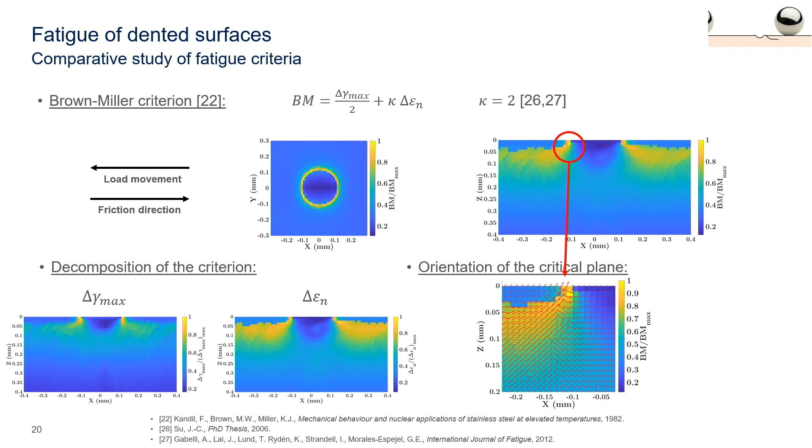With all these different criteria, you can choose the one you think is appropriate for your problem. Typically, we have also been working on the second Dang Van model, slightly modified. We are also able to find where the crack could initiate. We chose the Dang Van criterion and also the Brown-Miller criterion to do the simulation.

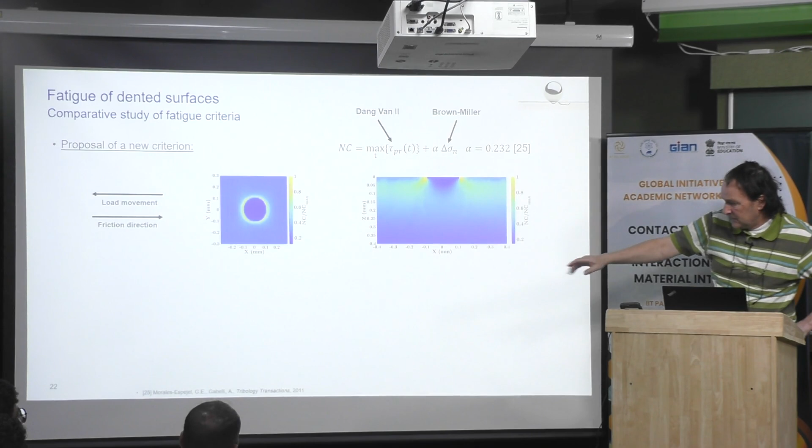At the end, we mix the two criteria. We keep from the Dang Van the shear component, and from the Brown-Miller we keep the normal component, in terms of stress. We also found in the literature the values for that. Guillermo Morales is working on the same type of material, bearing steel, which is also interesting since we don't know the parameter.

Again, you can find the effect of each contribution, shear and mean stress, or here the maximum normal, the amplitude of the maximum principal stress, and also we can find the direction of cracking.

I just initiated the discussion just before. This is a very nice experiment done by Kaneta in Japan. He demonstrated what I said before. You have here the initial dent, you have some rolling sliding.

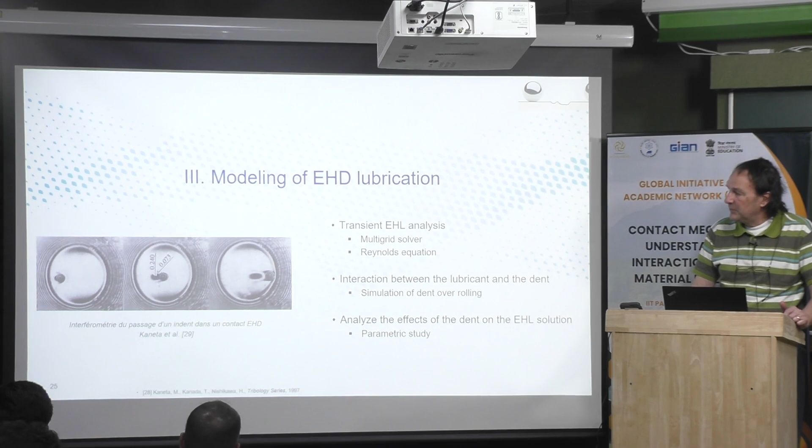I can see from the picture that the dented surface is moving faster than the flat, smooth surface. Here at the beginning you can see the pocket, within which you have some oil, pressurized at very high pressure, in a glassy state. Because the pocket of oil is moving at the mean speed between the two surfaces, it moves to the rear of the contact, because it is moving slower than the dented surface, and you can see that a second dent appears due to that. This is exactly what I said before.

And these are the equations. You have the Poiseuille flow, which is typically what happens in the convergence; this is what creates the film thickness. After that, you have the Couette flow in the high pressure region, and here the restriction, then the speed of the lubricant accelerates to maintain the same flow. The last term is a squeeze effect.

If, for example, you modify the load.

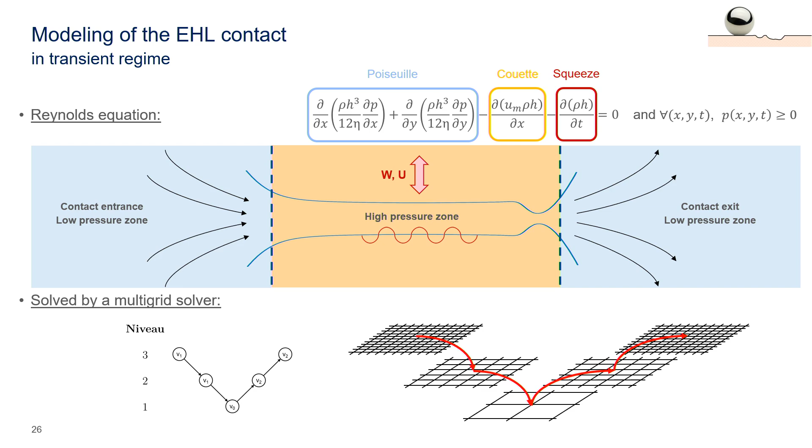This is what we did, and as I said, we don't use that for solid mechanics because it's quite complicated. You have to jump between a fine mesh, a medium mesh, and other meshes, with several levels, up to 7 or 8. There is some recipe for that, because you have to do sometimes V cycles or W cycles, and you have to remain several iterations at a level.

There is some recipe, some experience needed to deal with that. But for that we use this method, and then we were able to do some EHL simulations. You can see that when you have a very deep dent, you have cavitation, and the solver is not today capable of solving that properly, so you have to be careful with the results.

There is a guy from China, named Dong Zhu, who proposed some simplified method to deal with that, but there is a lot of discussion in the literature. I remember a discussion by Kees Venner from the Netherlands, complaining about the use of this simplified method, but anyway.

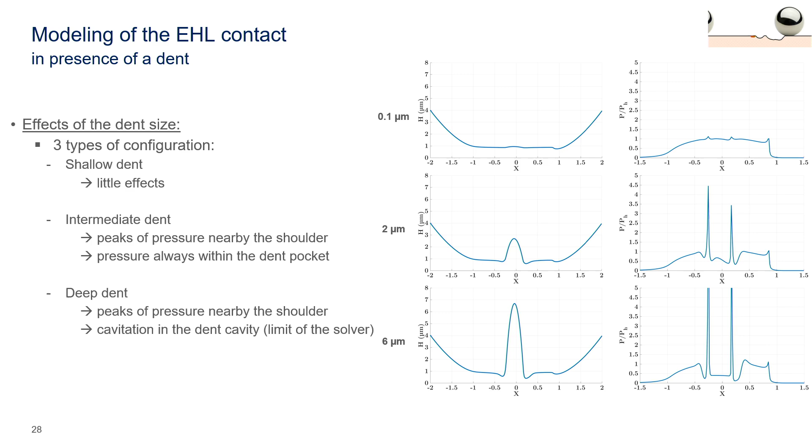This is more detail about what I said before. You have here a dent which is very shallow, 0.1 micrometer, and on the deformed shape there is almost no residual dent. You can see the effect on the peak of pressure, which is very low. Then you can see something with a depth which is 2 micrometers.

Then you still have a full film thickness here, and you can see the peak of pressure on both sides. This is something for 6 micrometers. Now there is no result for deeper dents because there is some cavitation and we are not sure about the quality of the solution.

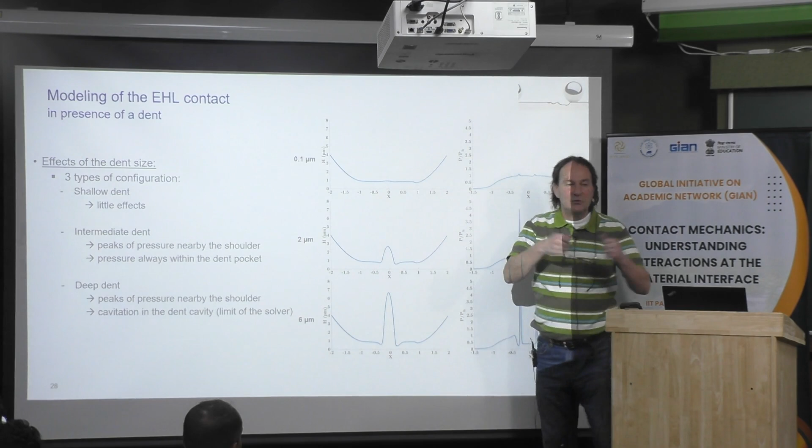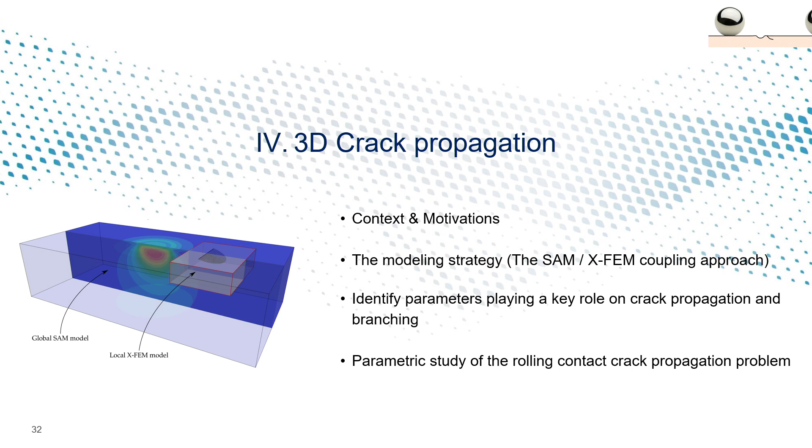The idea here was to use two models that we can connect together. The local XFEM model, the box, is made with a finite element method. We use a free software which is Castem, which is quite simple. It's written in Fortran, and then we can couple both.

Here it's the contact, and we create an initial crack like that. We have the ball rolling on the crack, and then the box, then the crack is propagating. I will explain you the XFEM technique.

Then the crack is propagating, it will expand, and then the box will be growing. We have to manage to increase the size of the box to follow the crack propagation. Now you can recognize the mechanism we are interested in.

What we want to know, especially, is how the crack is propagating and why the crack at a given time will branch and go straight to the surface, normal to the surface. This is in fact the mode of failure of the gearbox.

Or why the crack does not go up like that? Because if it goes up like that, it will create a spall, a metallic part. You can detect it, and then you have to stop the engine. This is the idea.

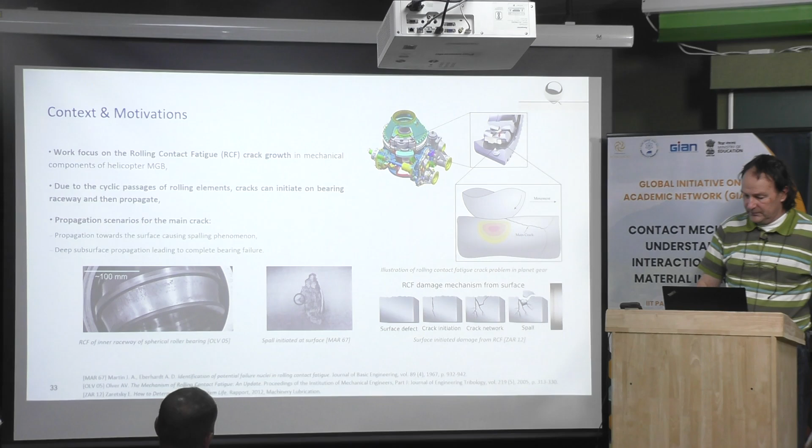Okay, then we assume that the crack is present. We have been working before to try to determine the initiation site. Then we proposed the fatigue criterion. Now I think that we know where it will start.

But we assume that we have a crack which is half-elliptical. We have a given angle from the surface. In fact, this is quite similar to the work of Kaneta, who studied that a long time ago in 1986. Did a few things like that.

A lot of people in the literature try to work on this subject. You have to know that, for example, for Kaneta and for many recent researchers, there is a problem: when you have a crack, you have two faces, and very often they do not consider interaction between the two faces. I mean, when the surfaces are touching each other, in most papers in the literature, they do not consider the interaction. But we do consider the interaction here.

Then for the XFEM analysis, what is the technique? Okay, this is for the SAMs, I will skip this one. For XFEM, in fact, the principle is that there are two techniques to mesh a crack. When you have crack propagation, one technique is to remesh.

You have a crack, you mesh the crack, it propagates, and you have to redo all the mesh. This is a classical remeshing technique, which is used by ANSYS, for example.

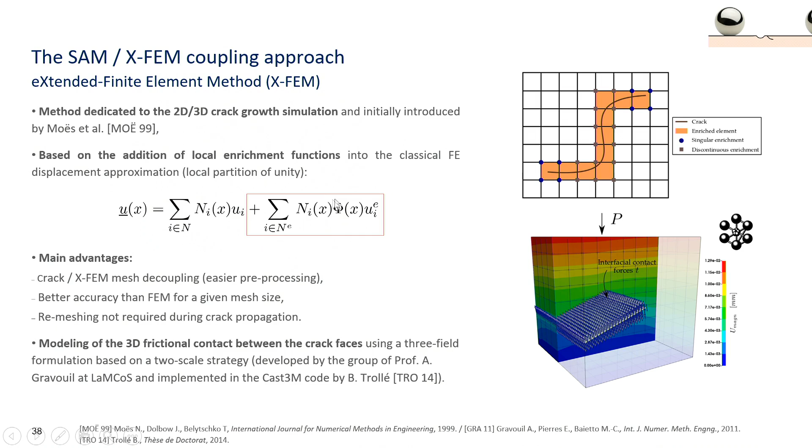This is what we call the enrichment function, which is here. They provided the solution for that, and this is now what is used. Depending on where the crack is located within the element, you modify the weight function, in fact.

With this technique, you do not have to mesh the crack. You may have a very coarse mesh, which is very interesting. This is very, very fast. Also, now you can find—I have a colleague whose name is Molnar.

He published a paper explaining that. He provided in the paper the Abaqus subroutines to simulate it, for example. You can find it, it's open access.

What I said before is that we do consider the interfacial force between the crack surfaces when the two surfaces are touching each other. There is no interaction, in fact, no penetration. You have to be careful, because when we compared our result to Kaneta's result the first time, it was not the same. To find the same result, we had to remove this facility, and by removing it, we were able to find the same result as Kaneta.

The code that we use is CASTM. Now the name is Cast3M, which is a free code.

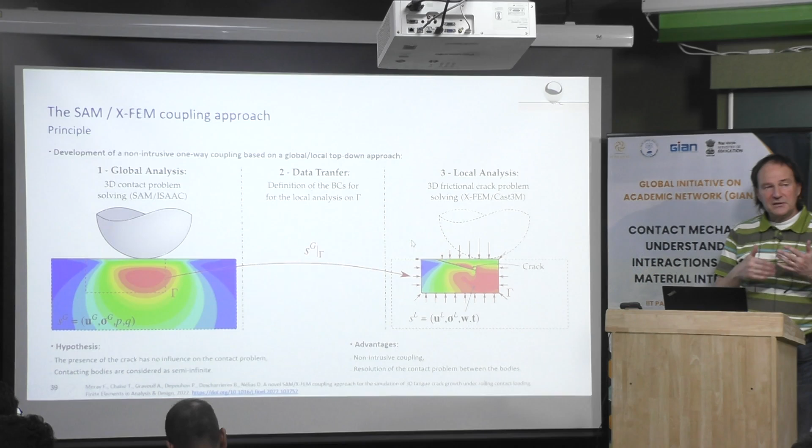The idea is to have the contact model, create a box. In the box, we put the crack. Now all the numerical technique is to apply the correct boundary condition, which is not really easy, because we have to manage nodes, we have a surface of elements, and we have to transfer all that.

On the surface of the box we are using, we should be in equilibrium. Each time we have the traction vector that we calculate on each side of the box, and we make sure that this is equilibrated.

The idea is to calculate the stresses on each surface of the element. We interpolate the stress, and after we apply the boundary conditions to the box, and then in the box we have the crack. The geometry is very simple, it's just a square box with a crack.

We may also use residual stresses. We just have to add these stresses in the resolution, and of course we may have a gradient of residual stresses, or you can have residual stresses from the denting.

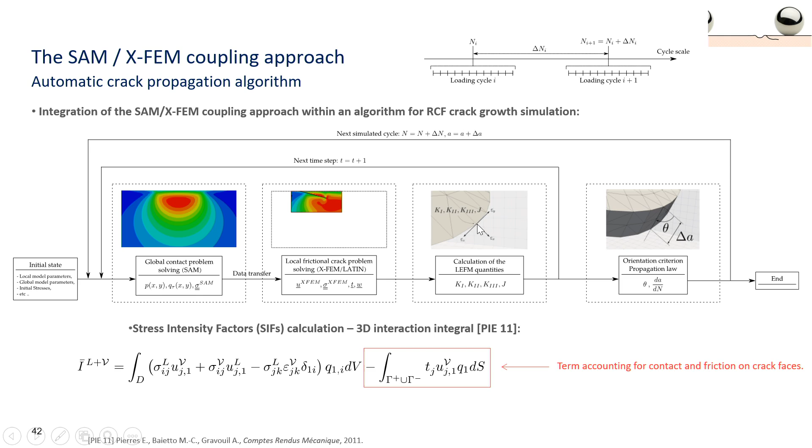When you have that, you can calculate the stress intensity factor, mode 1, mode 2, mode 3. And then if you have a crack propagation model, you can calculate the direction in which the crack will propagate and how much per cycle. Theta means the direction of the crack, and delta A means the increase of the crack length, cycle after cycle.

There is also a term to account for the friction between the crack faces, because we do consider interaction between the two faces of the crack. So we use a jump cycle procedure. We do not have to simulate each cycle, because if it is only 10 nanometers of propagation, you can save a lot of time doing that.

This is an example of the problem. Also something different from the literature: in the literature, sometimes you can find similar work, but very often they just assume a Hertzian pressure distribution, with no contact involved. Here, we are able to solve the contact. If there is some surface defect, the pressure distribution is perturbed by the defect, and we can account for that. Because the SAM method is very efficient and fast in computing time, it costs nothing, in fact. But when you use only a finite element method, it can be complicated to do that properly.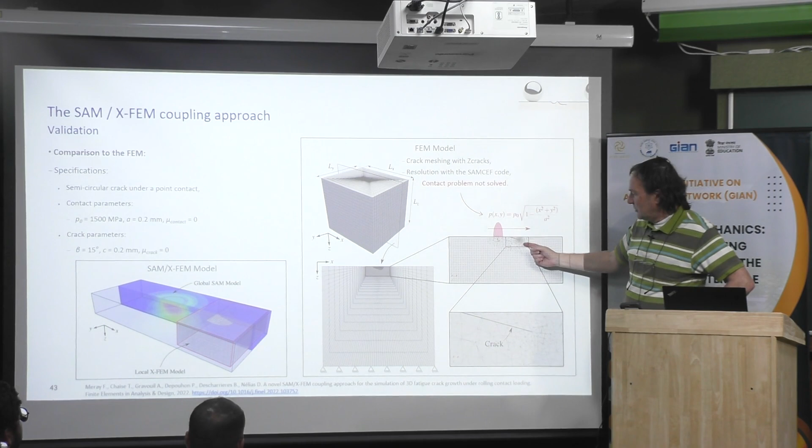Here you can see the crack. First, because we were working for a company, they wanted a comparison to their model, which is based on Z-cracks with SAMCEF. This is something done by another group in Paris, France. They study the propagation of the crack each time by remeshing the crack after each time step. This way we found the same results, and that validated our tool.

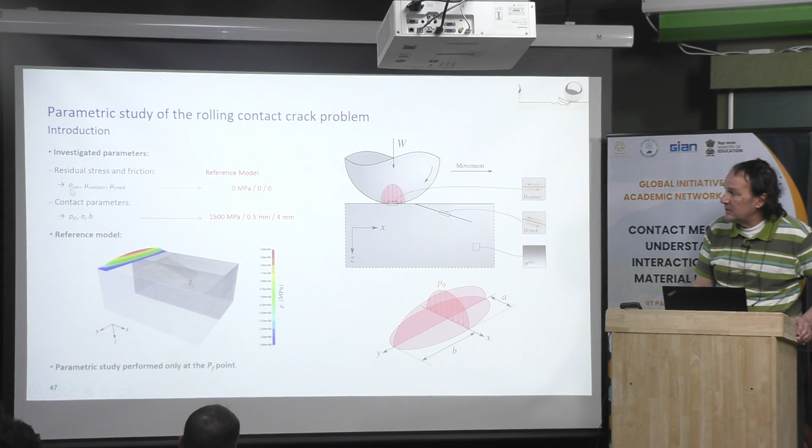We will consider then the reference model as without residual stresses, without friction force at the contact, without friction force between the crack face. And the contact parameters: the load is 1.5 gigapascal for the Hertzian pressure, 0.5 millimeter for the semi-minor axis of the elliptical contact in the rolling direction, and 4 millimeter for B, the major semi-axis in the transverse direction. This is the reference situation.

Then one of the results is here, this one is very important. When you have compressive residual stresses, because it is negative, the crack will have the tendency to branch towards the surface. When you have no residual stresses, it will go straight. And when you have tensile stresses, it will have the tendency to go in depth, like that.

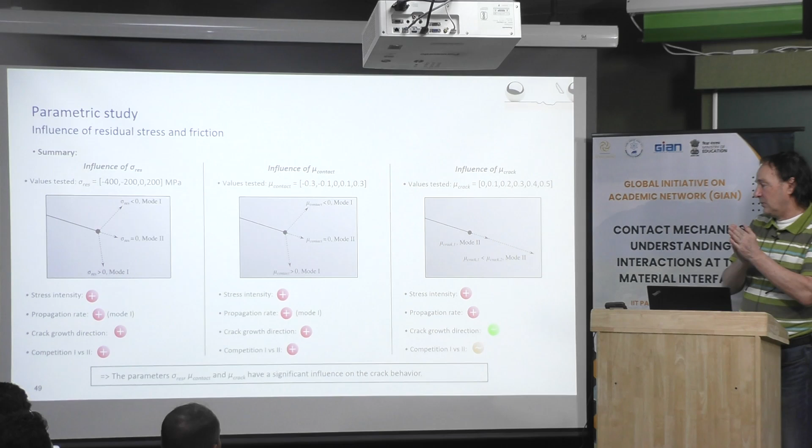This is what is said here, and this is the opposite - I have to check. Here it is said that when the friction coefficient is higher, the crack is propagating faster.

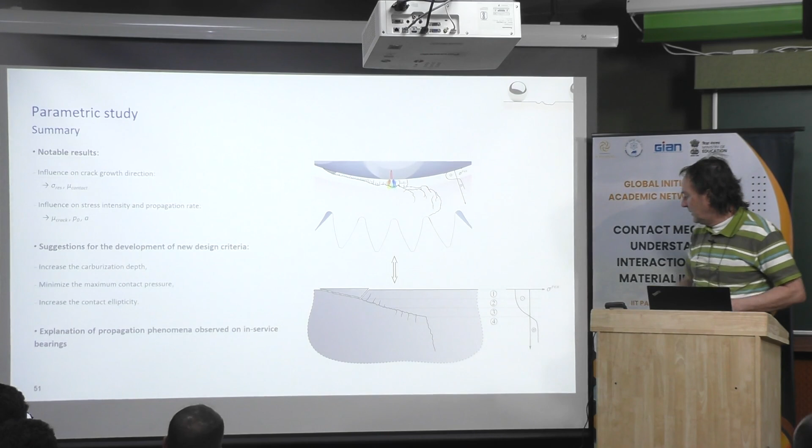And then this is explained by these different steps you can see here. Okay, there is a schematic view here, compressive stresses and tensile stresses. Then this is what I wanted to show you. If you have any question, I will be happy to respond to your questions.

And this is a very practical application of what we have been developing since many years.

Sir, so can you please go to slide 49? So in this, what is the meaning of the friction coefficient being negative, like the contact less than 0?

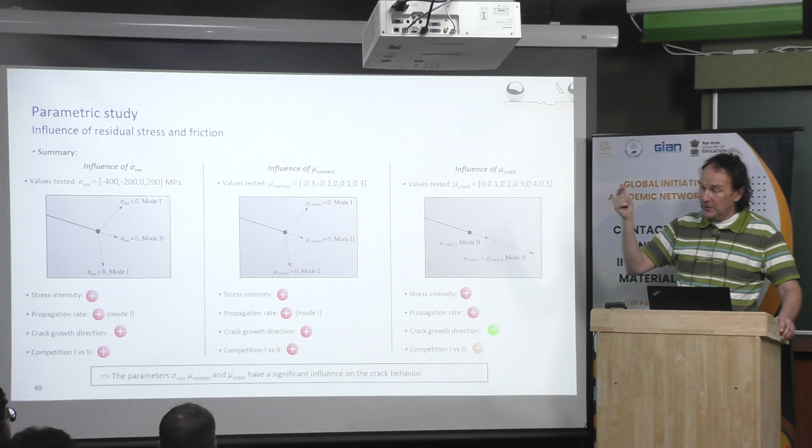Just because if sliding is in one direction or in the opposite direction, okay? Of course the friction coefficient should be always positive, but you just change the sign depending if the roller is moving faster than the opposite surface of the ring or not, this is just that. Positive means along the direction of rolling along the x, and negative means against. Positive means that the roller is moving faster than the ring. Here, this is the ring, the roller is here. Positive means that this is in this direction, which means that the speed of the surface of the roller is moving faster than the surface of the ring. And when it is negative, this is the opposite.

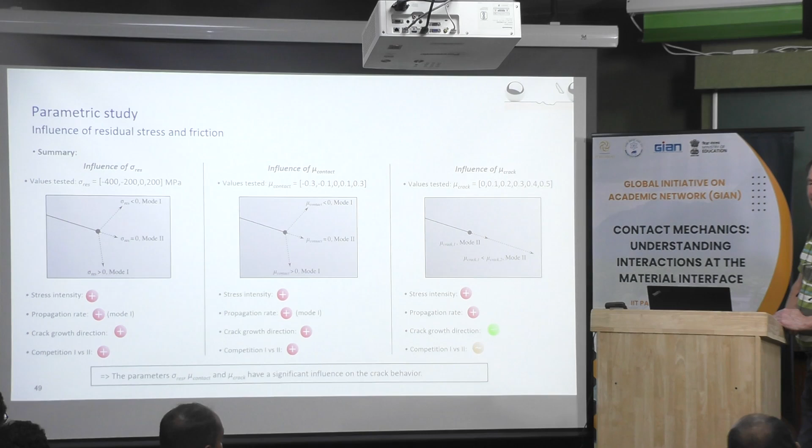Mu for crack: so if mu crack 1 is less than mu crack 2, then we will go for this. It is correct. What I feel is, if it is mu crack 2, we are considering if any other crack is there, if that friction will be higher, it will not go to that side, it will keep on going to where friction is less. So that is correct. My point is, how can we measure the mu for crack? We cannot measure mu. So it is simply that we are predicting it is 0.1, 0.2, 0.3, it cannot be measured. In fact, when you do the model, you give a number for the friction coefficient. I think there is no other way.

Just when it is lubricated, it is below 5%. Okay, when it is dry, it's between 0.1 and 0.6 or 0.8. But I don't know. So this can be presumed on the basis of what material we are taking and the cohesive bonding between them. On that basis, we can choose that point. If they are having more cohesive bonding, they will be having higher friction. In fact, my personal opinion on that, this is only me.

I consider that when you have a crack, for me the friction coefficient should be 1 or more. Why? Because the surfaces are not flat, they are like mountains and valleys, it blocks everything. For me, the friction coefficient should be infinite. There is no friction... but in the literature, they put some friction coefficient. For me, it should be 1 or more, not something like 0.1, 0.2, 0.3. When you have a fresh crack, after a while, of course, it will be rubbing, it will be wearing, then after a while you should have something flat, especially when you are far from the crack tip. But near the crack tip, it should be close to 1. This is my personal opinion.

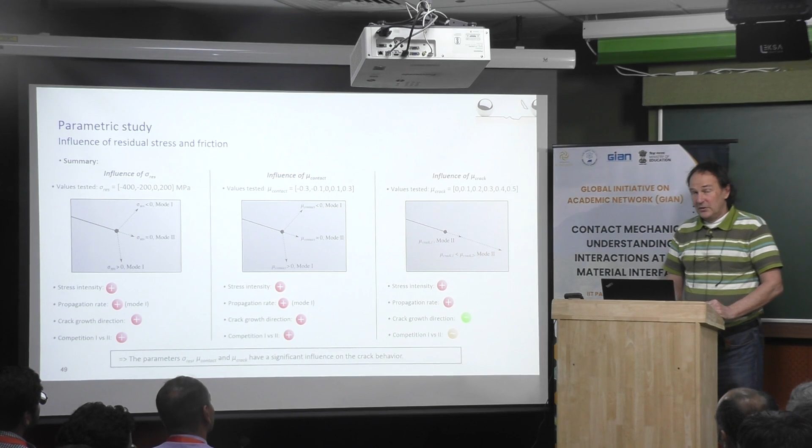Why was there not any plastic zone created ahead of the crack? We do not consider plastic domain. In fact, this is what we call linear fracture analysis, linear fracture mechanics.

Most people do not consider plasticity. In fact, overall, this is elastic. As you can see, the load is very low, 1.5 gigapascal for this type of steel. Then the material is globally elastic.

Since you have a crack tip, the stress should be almost infinite at the extremity. Then you have some plasticity, but it should be very limited, and usually people do not consider plasticity. There is some more complexity in the work, but you can neglect it. I think this is so complex that you can make some assumptions to try to get a solution.

Sir, is it possible to find that slip band effect on the subsurface, which happened before starting the crack initiation? Actually, it is the origin of crack initiation. Is it possible to find that slip band effect through the simulation?

Yes. I think if you want to work on that, you need to have a crystalline model for the material. Here we assume it is homogeneous, isotropic, and so on. We do not consider multigrains. To find the sliding bands like that, you should have a crystalline model. Then some people are working on that, but without that, you cannot get a solution.

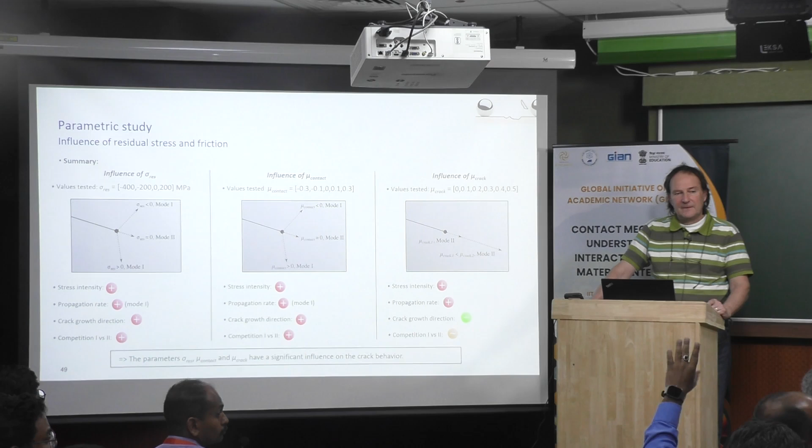It was already mentioned that crack is initiated, is not talking about... Yes, of course, we do not consider that. But how can we find the initial direction of the crack? And what you said, you should have something which is a crystalline model, I think. This is a work of our colleague from material science. We have to work on that.

One last question related to the previous one. Where we are considering mu for the flat surface and the particle coming in between, why are we not considering another mu between the roller and the particle? Because by simplicity, we just wanted to have the same coefficient of friction. Yes, this mu and another mu we are considering, two mu we are considering, only we are leaving the third one. Mu between the cylinder and the flat surface we are considering, and flat surface and particle we are considering, but we are not considering the mu.

Yes, maybe there are two reasons for that. The first one is we assume that the friction coefficient will be very low because it is well lubricated. Then it will be a question of a few percent. And also, to simplify the analysis, not to have another parameter.

But I finish, I think. Then maybe you can keep it for tomorrow.

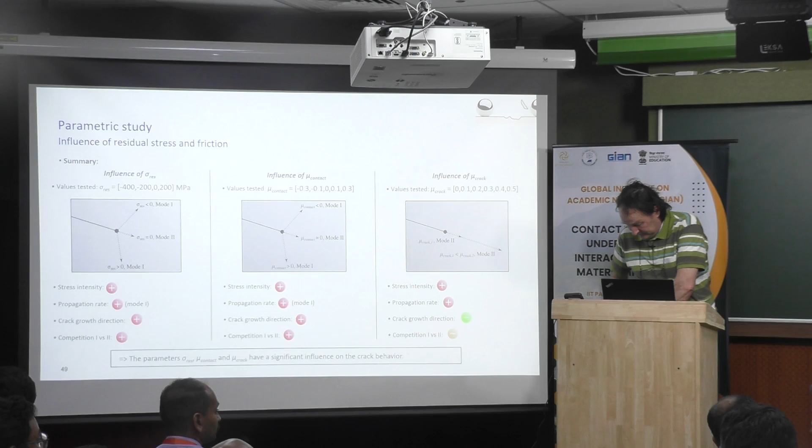Okay, sorry, I was a little late, so what was the solution to this failure? The solution... In fact, there is no solution because it happens only one time. To avoid it for the other gearboxes, now they have to manage, I don't know exactly what they did at the end.

Okay, we just built the tools and so on, provided the report and so on. But you can see here that there are some parameters they can play with. Maybe I can go back to this slide. For example, you can manage to have a deeper area with compressive residual stresses at the surface. You can manage to reduce the bending of the gear, for example, this type of thing.

And also they had other solutions, it was in the video. They modify the trapping of the particles by using something magnetic with highest flux, with less particles they are able to detect a failure, things like that. Something also funny in the movie was hearing that during transportation one time, one of the gearboxes fell down, and at the beginning they were thinking that it was the cause of the failure. So now they put some sensors on the box when they carry a gearbox.